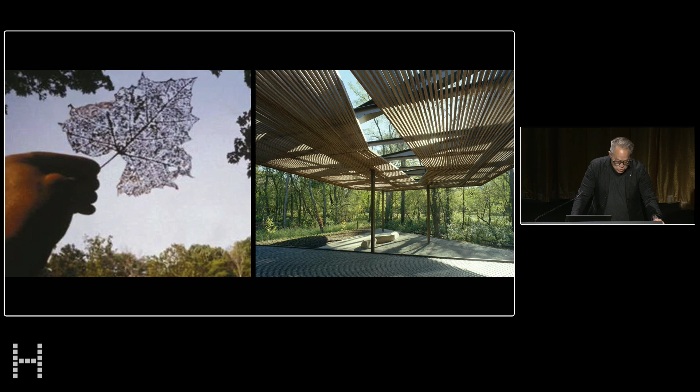So rather than see abstraction as a removal from reality, we really think of it as the process of connecting to place, generating a productive tension between the local and the global — I like to call it the glocal — and looking for possibilities of using an economy of means for a maximum of meaning. Here, 1 + 1 never equals 2. We're always looking for 1 + 1 to equal 3 or 5 or 7, really to create the value proposition in our work — in this effort it takes to be resourceful, working with very little, to emplace architecture in places you would least expect to find it.

We're a firm now of 25 very talented folks based in Fayetteville, and over the last 30 years we've been working on a variety of building types and scales, everything from a carport to a new American embassy in the poorest country in the world, the Central African Republic. This map shows how we've begun to spread out and work nationally and internationally, but always thinking about vocabulary, syntax, grammar—how we speak through the fundamentals of architecture: space, material, and light.

For us, place is the canvas, and architecture is the medium, shaped by the forces of nature and public life, in particular to local form. I like to say we do work that's in the place, of the place, for the place, and sometimes necessarily out of place. That's the way it works. Place is defined as a tangible representation of that intangible society that lives within it.

I like to call this placeness. To make an architecture of placeness, I think it's necessary to embrace everything, even the bad things of a place, to get below the surface to the underbelly, so we can understand these things and incorporate them into what an architecture of the place, in the place, and for the place can be. Often this is really a transformation story, and I like to think of every project we're working on as that.

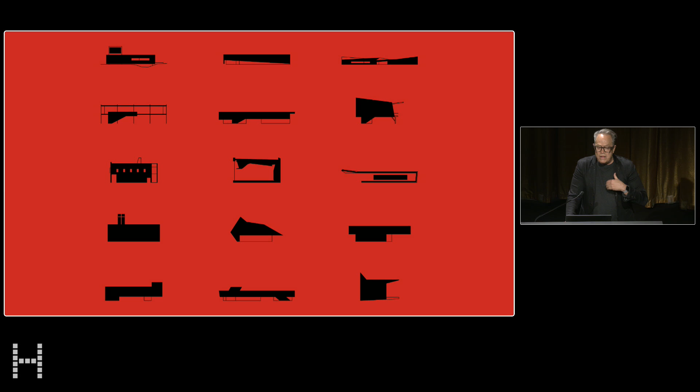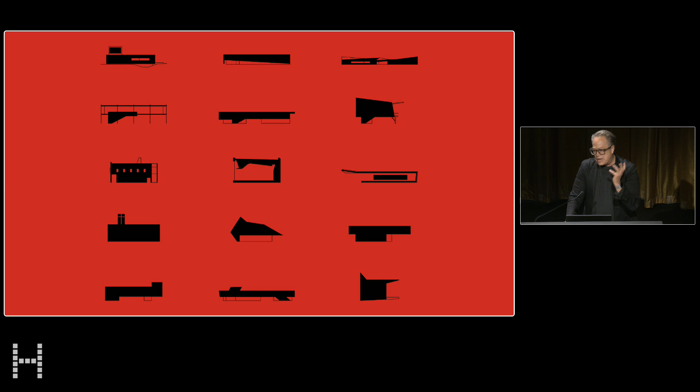As a former cartoonist, which I did all the way through college, I only recently, in the last 10 years, discovered that almost everything we do is sort of sectional, really thinking of architecture as a visage. So the fugitive nature of the profile and the silhouette is very important to the work. Part of that is because we're working in places where there's more space than form, so we work in the round. We have to design every facade, not just an infill, so we're always thinking about how it presents itself against the horizon.

So I'll dive into some projects. The first project is one that Grace brought up, and I think it embodies a lot of what we're about. This is the St. Nicholas Eastern Orthodox Church, a small congregation worshiping in Springdale, Arkansas. They were worshiping in a pretty rundown office building, not a very dignified place. They have a very aestheticized form of worship.

They were desiring a new sanctuary and fellowship hall, and one of their parishioners died. So they took the money she left and bought 3.5 acres next to the interstate, and with the money left over they wanted to build a new sanctuary. We went out onto their site, and they had about $100 a square foot to build this. I asked them, how do you want to approach this? They said, well, we think the best idea is to take this old welding shed on the site and turn it into the church. I said, you mean tear it down and build on the footprint, right?

And they said, no. I mean, we only have $100 a square foot. My heart just sank. What to do? But we did what we do on a lot of projects: go do the research, go back to the origins. We thought, what could we do as an architect that wouldn't cost anything or much? Proportion and scale are relatively free. So we went back to the origins of the Greek proportioning system and the origins of the church, looking at early churches and chapels, and using this proportioning system reconfigured the whole metal box into this new sacred figure that captures all the icons and the colors. Then we threw in a little bit of Corbusier, because I believe everything goes better with a little Corb, and this makes this new church.

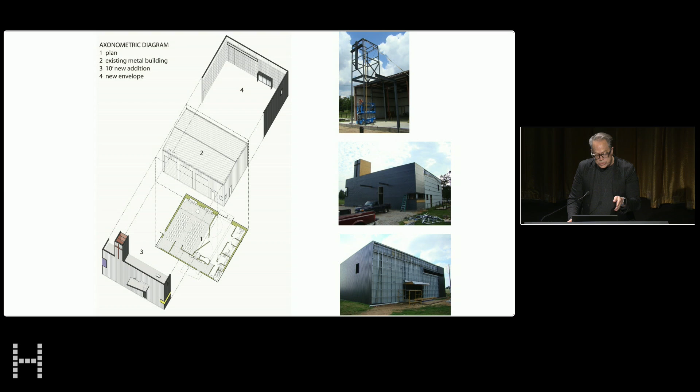How did we do that? Well, we took the existing building and left it essentially as is. We wrapped it in a new box rib metal skin, off the shelf. We then added 10 feet to the front of the building to create a narthex that could get you back on the traditional east-west axes, with movable walls that open into the fellowship hall, which can also expand during overflow services. So pretty straightforward.

And then we carefully coursed everything. With a fidelity to craft and thought with this ordinary system, we customized our own transitional details to get the maximum level of seamlessness we could in the transitions. Even the doors are coursed, the windows, quite precise. You can see the concrete pad that tells you where the exit door is. But really trying to elevate it, we cut one window in the existing building to get some morning light.

The iconostasis is made out of angle iron. But one of the things they really demanded was a dome.

We couldn't put it on the building because we had pre-engineered structure, so they allowed us to put something underneath. They couldn't afford a dome. The contractor couldn't afford it, or didn't know if he could build one that would meet our standards. So he had a friend of his who loved beer, lived out in the country about 20 miles away, that we traded a couple cases of Budweiser for. And here you go—he gave us a satellite dish.

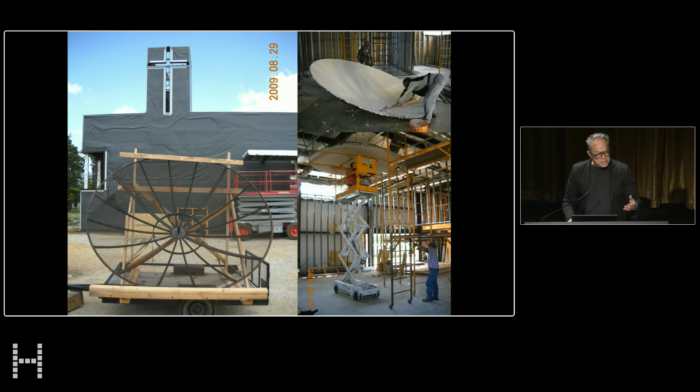So we took the satellite dish, brought it in, skim-coated with plaster. It's got its own natural lath, jacked it up on a scissor lift, and we have our dome. So that's how we roll in Arkansas.

And I told Father John, I said, this is fantastic. Now you have a direct connection to God. And he informed me it was kind of pointed in the wrong direction. But nonetheless...

As Grace said, we got a call in 2013 to inform us that this had won a National AIA Honor Award, which we were really excited about. And they said they were really impressed with the budget we built this for. So we went back and did some research, and they came back and said they believe this is the least expensive building to ever win a National AIA Honor Award.

So it really underscores what we've been trying to do for the last 30 years, which is to demonstrate that architecture can happen anywhere, at any scale, at any budget, and for anyone. It should not just be reserved for the few—it should be accessible by everyone. And I think this project certainly proves that.

So this idea of taking our local material culture and using that as a way to intervene is happening now in a new project at a much different scale, a much different budget. This is the Whole Health Institute—well, not exactly this, this is something it's not going to be—but the Whole Health Institute on the Crystal Bridges campus in Northwest Arkansas.

This is a national preventative health institute that deals with life management and well-being, as well as Art Bridges, another national institute committed to getting art out of museum basements and into communities. That's all part of this complex.

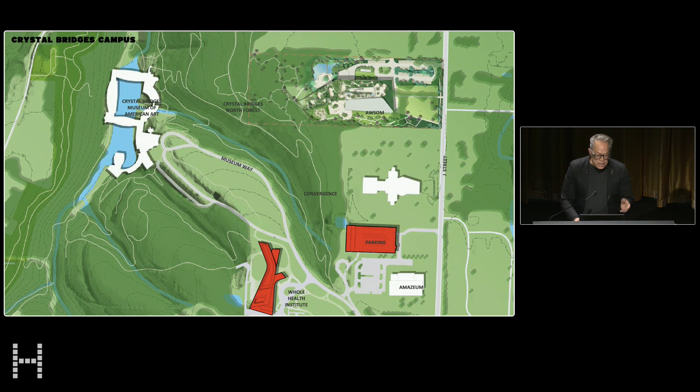So this is the campus of Crystal Bridges Museum. This is the Moshe Safdie Design Museum, bridging over the creek. There's a new medical school being built, a college about preventative health, and then in red you see our two buildings—on the left, the Whole Health, and then an 800-car parking garage that had to be built because this was displacing surface parking.

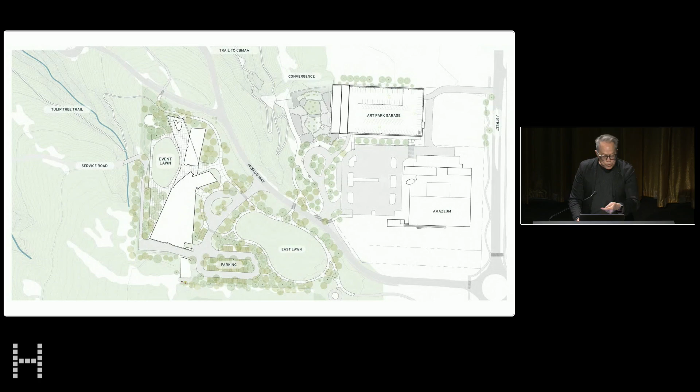So you begin to see the building as it curves and begins to gesture around the existing ravine to create an event lawn, as well as greet people with this dog trot that goes through the site. It's really a type of extended threshold through the site.

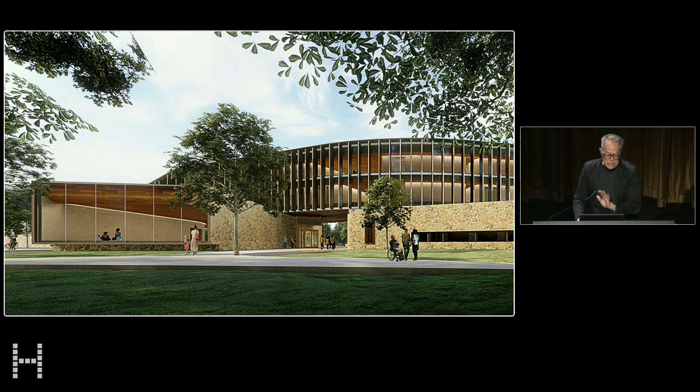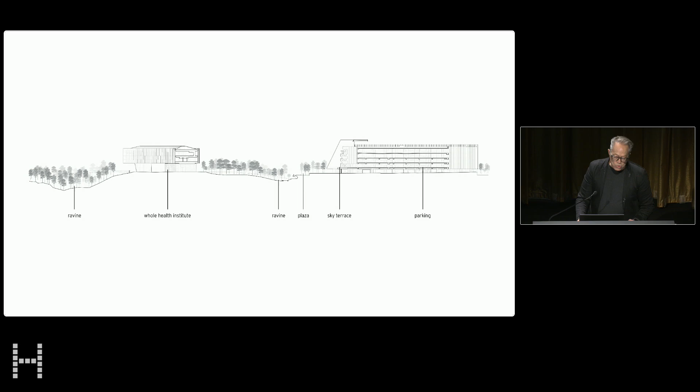The upper part is all developed through a series of pre-weathered brass fins, a brise-soleil on the east and west side. So you have the base, you have the top, and you begin to see how the ravines help create the responsiveness of both the garage and the whole health institute in their forming and shaping.

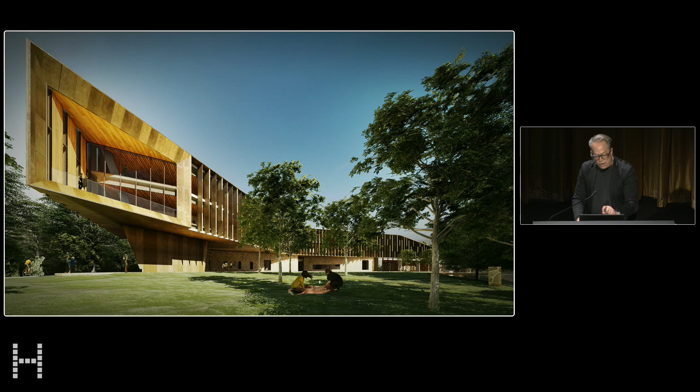And then creating a variety of porches and thresholds in the campus. So this is where people first come onto the Crystal Bridges campus, and then the community porch here, all the offices up above, all the event and public spaces on the ground level. And so the material strategies are quite

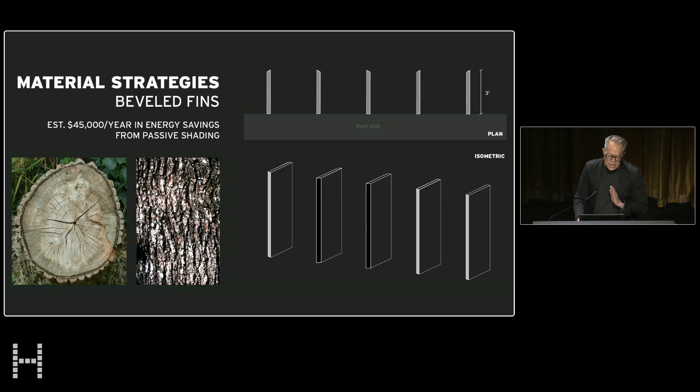straightforward, taking the analog of the tree, the fins, the vertical striations of the forest, but then translating that into pre-weathered brass fins, and then manipulating the edges of those fins to reflect light and shadow and create a kind of kinetic device as they move along.

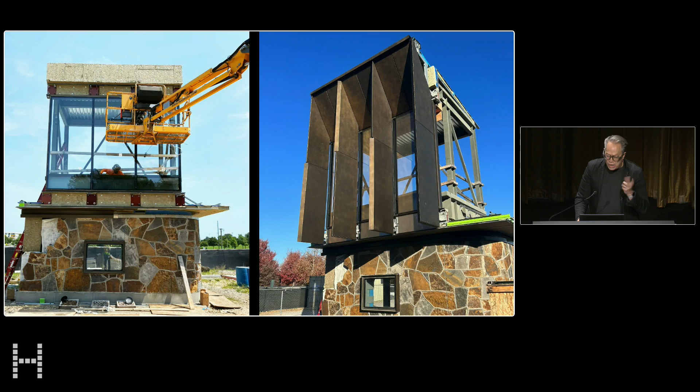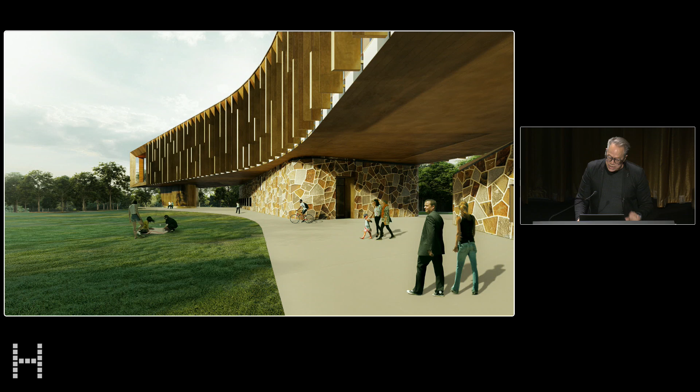So this is the mock-up, full-scale mock-up that we've been working on, to test the stone, to test the brass fins, but this is the effect we'll be looking for. And here, kind of the flickering, so it pulses with the forces of the nature across the day.

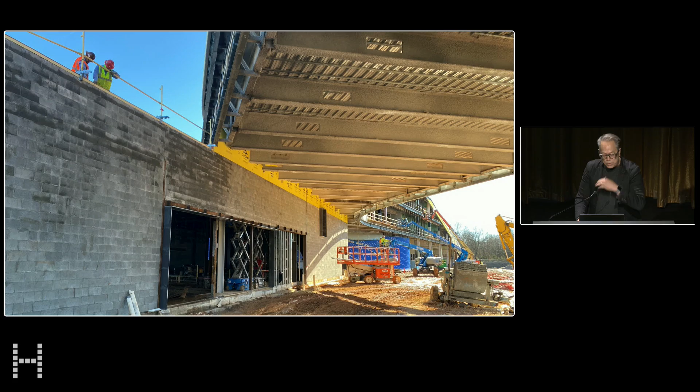It's currently under construction, so here the wall is awaiting the stone, and then the copper, the bridge is flying over. The stone, it's never been done at this height. It's 19-foot tall. We've done a lot of mock-ups using rope joints and really careful selection and mix of stone, and also shaping of the stone to get what we're after here. But this really will begin to enliven what's below.

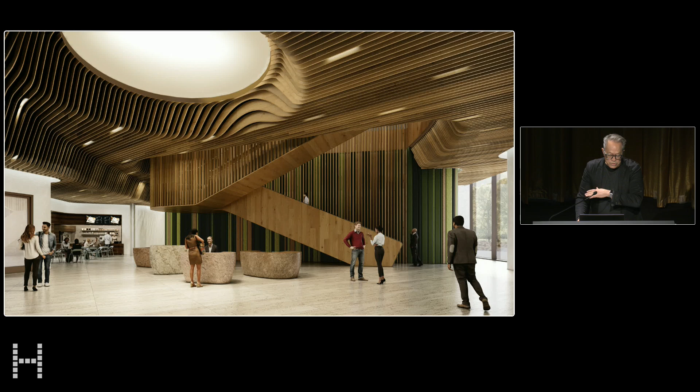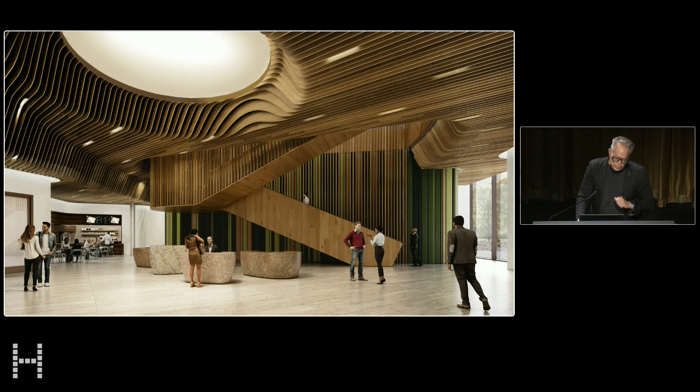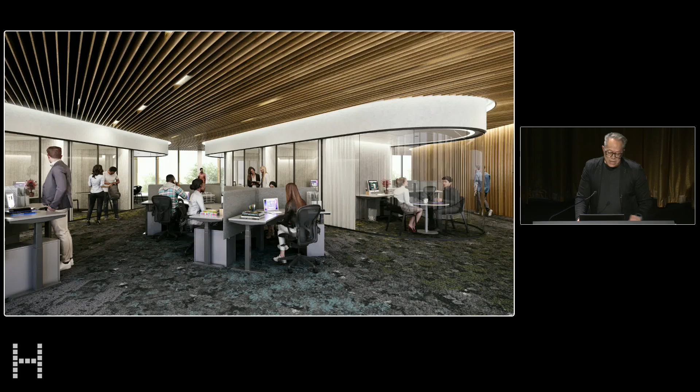And then once you move inside, that stone translates to a stone floor, but then the forest is actually pecan ribs that's CNC milled on the computer to kind of create the canopy and the datum for each one of the spaces here. So this is the entrance here, but even up in the office area, that datum of pecan sort of establishes the relationship, reciprocal relationship, and then a series of offices, open offices, and conference rooms are sandwiched between.

And so this is under construction now. Like I said, it should be done by the end of the year. It really becomes about an intersection between art, nature, architecture, and health. And that is kind of a new thing for a museum campus, to expand into architecture and health as part of its mission. And my parting shot here of the piece that's under construction at the moment.

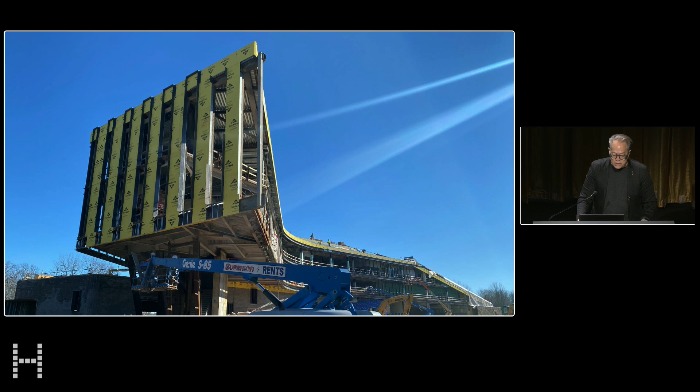Now, its companion piece is a parking garage, which is really just supposed to be a parking garage, but we threw out to the owner, we said, well, what if it were more? It's right on the edge of this playscape, goes down a ravine called Convergence, has a plaza. Bryan Hanes' studio out of Philly, landscape students, architecture firm is doing that.

So we came up with the idea of a proscenium where art performances and art can happen, and people come through the garage and through the proscenium, and then a glass bar down below and a retail shop and other things. So we really start to program it. Again, 1 + 1 has to equal more than 2.

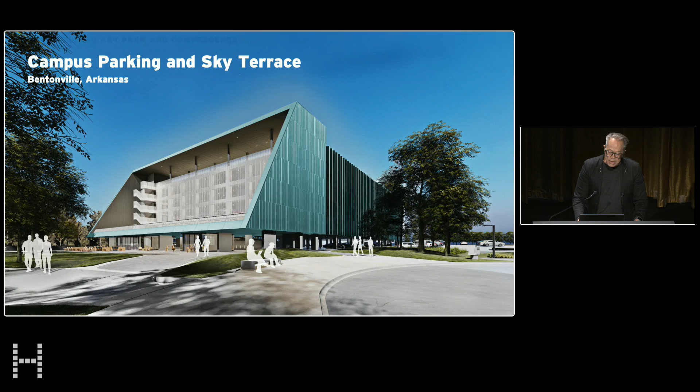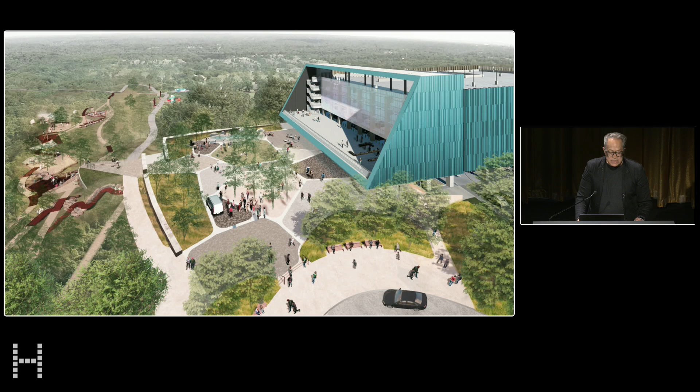And you can see its relationship to the plaza and how it receives the landscape, both going down and coming back up, can kind of get a sense of how that works. So it really is like a big catcher's mitt at the end of that.

One of the things that we've been working on material-wise to give specificity and identity for very little money is working with Sherwin-Williams and PPG codes, automotive body paint. They have every code of every paint that's ever been done in the automotive industry. And so this is my grandmother's '65 Pontiac Tempest, Agua Azur.

So we customize paints, and if you're using a lot of metal, it costs very little. And then we use gold metal flake or silver metal flake based on Dale Jeffries, who kind of invented this with sports cars and race cars back in the 50s, and we tested out with that. So the whole building is all automotive body paint, which is very resilient and really comes alive, especially with the different light during the day and at night and with the sky and such.

But this will become fully, it's got some of the first bits of sculpture and stuff in it now, the lighting. It'll come online fully in about a month and a half right now with the new bar. So we're often working in strange contexts.

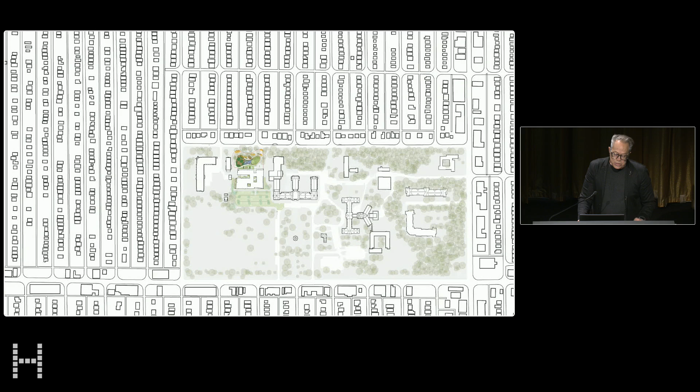I think one of the things that was really important to the community was to have an identity that was representational for them. We did not do the civic engagement ourselves; that had to be done with a third party, with folks that had the street cred to engage. But we got information back, and one of the things we heard from folks in the neighborhood is they didn't want a monochromatic building. They didn't want another stone building, brick building, or all-metal building. They wanted something polychromatic, something that represented their desire for diversity, inclusivity, and such.

I got to talking with the vice president of Kresge Foundation, Wendy L. Jackson, and I was thinking, it's terrifying - I don't know if you've pulled a lot of color into a building, but it's one thing to be inside, another to be outside, especially when your only color is red that you work with. But talking with her, she said, try to think of this somewhat like a quilt, a patchwork. And I said, oh, you mean like the quilts from the quilt ladies in Gee's Bend, Alabama? She said yes. I said, well, I've been there many times. She said, well, so have I.

If you don't know who these ladies are, they're pretty amazing. They take discarded cloths, discarded rags, and stitch them together into useful and beautiful works of art, such that they're now displayed in MoMA, but also usable at home. That's the sort of approach. I went and met with and saw the Pettway family, who kind of runs the co-op there in Gee's Bend, just asking questions and looking around.

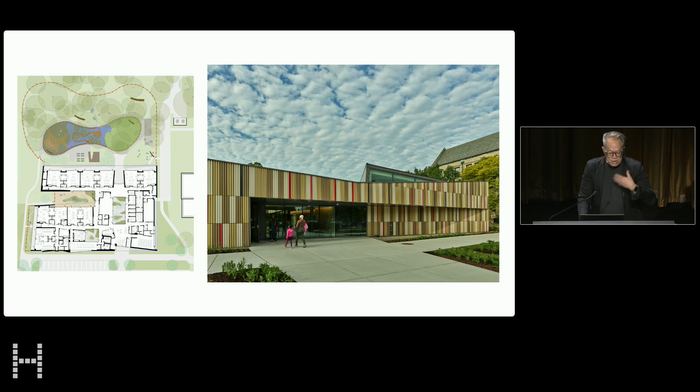So this articulates the facade. The wall leans in for your entry, and as you go inside, you come to your first courtyard. That's your focus. To the lobby on the left is a coffee shop for families. On the right, community spaces for different organizations in the community.

You begin to see how these work as vitrines for light, for meetings, and for play. Every classroom has a direct connection to a courtyard, so they can improvise and take learning immediately from inside to outside - it's a classroom in effect as well. You get to see how that works, again a controlled place for play, again talking prenatal all the way to kindergarten.

Every space, even the corridors, we carved away for places to sit and socialize. Here's their reading library nook carved out of that hallway, and community spaces where community groups can visit. So when a family drops their child off, they don't have to leave - they can stay, have a coffee, do work. They're really part of the center here.

These spaces also bleed off to the north side, on the neighborhood side in this case, where we have a play landscape designed by Margie Ruddick, which is absolutely beautiful. It's woven between this existing grove of trees. At night, it becomes a sort of beacon in the neighborhood. People come from the neighborhood and can walk through all the way to the other side - so there's sort of the local entrance and the more visitor entrance.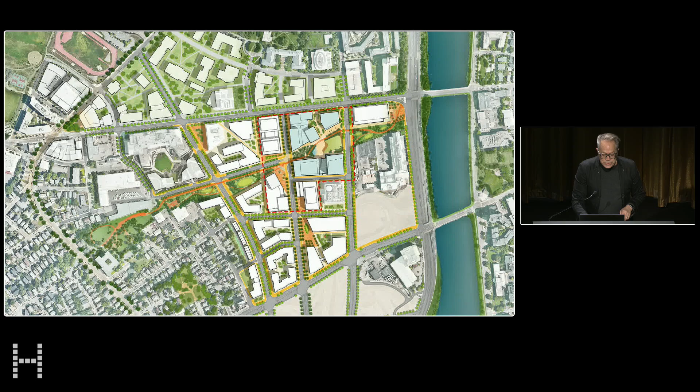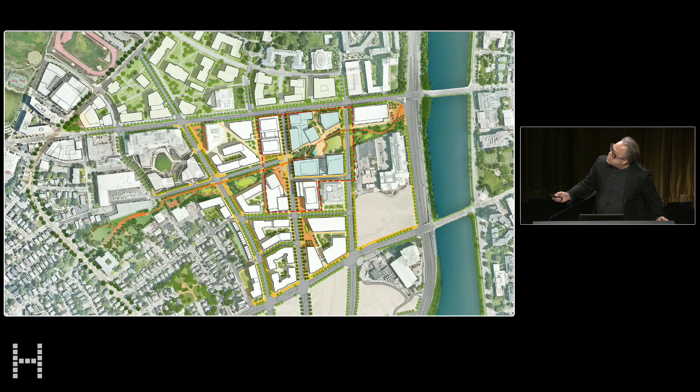Let me see if this works. So there we are, right here. This is the first part that's currently under construction. You can see how the greenway works all the way back to the river. It's really going to be a spectacular public way for the city.

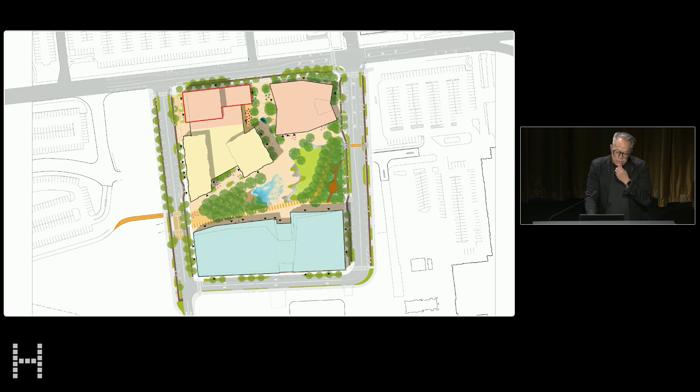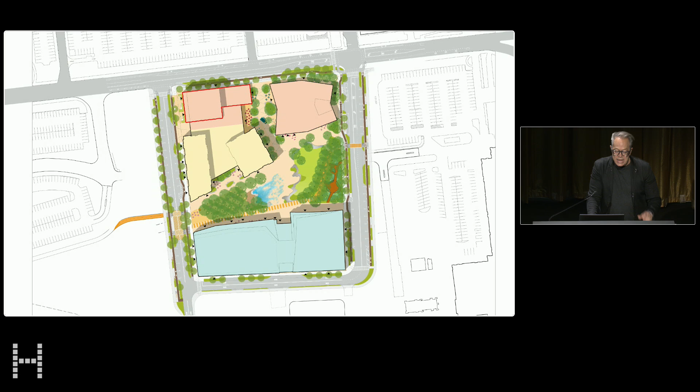Zooming in along Western, in many ways we sort of saw this ensemble that we were given. We walked in, and it had already been master planned when we were brought on. I sort of saw the master plan and the way things were arranged and their massing as like a still life on a table.

But that's what we were given, this sort of table and tower scheme. We were really interested in establishing frontality along Western. So we found a way to get rid of this idea of table and tower and just make it one thing, a frontal piece, then activating the ground floor. So now it's a very specific figure, activated with all types of business retail, but letting it touch the earth very lightly. Then shaping the skyline context of the figure so it begins to take on an identity, and enhancing the streets through landscape in a series of porches and clefts that people can interface with, between the laneway and the different landscapes.

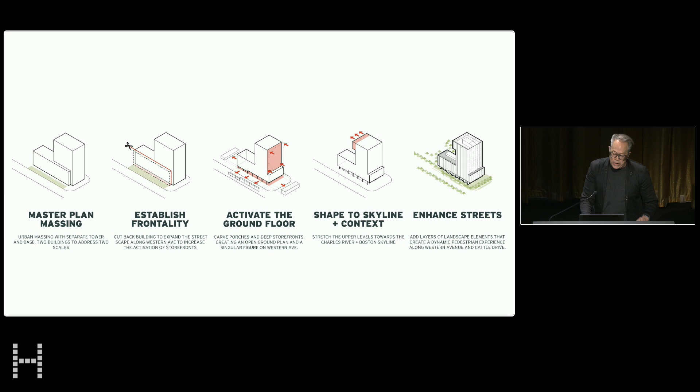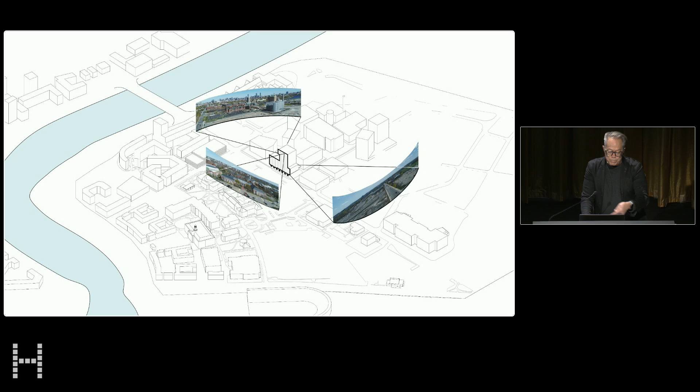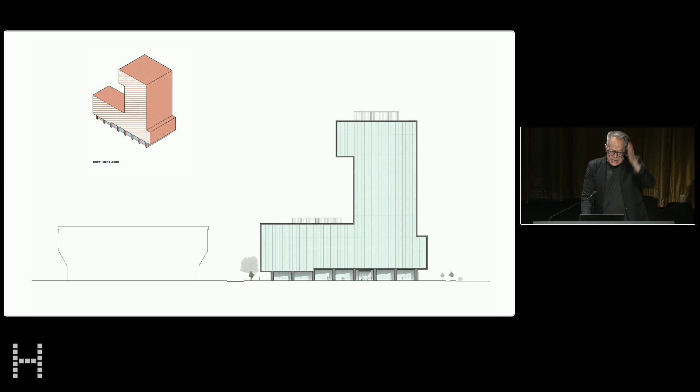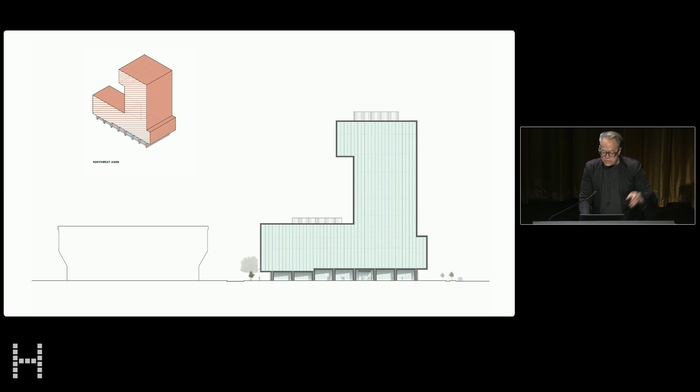Here's just the basic simple elevation. You can see how it begins to work with the massing along Western Ave, but just a very simple figure. The idea, on the north side, is to take the daily life of the hotel and expose it to the city. So all of the activity happening with the guests, closing curtains, opening curtains, meeting the sun, Life of Brian, all of that stuff can happen along that north side, and then it wraps on three sides in a beautiful, lustrous aluminum cladding system that's slightly scalloped and curves to create an exaggeration of shadow over the course of the day.

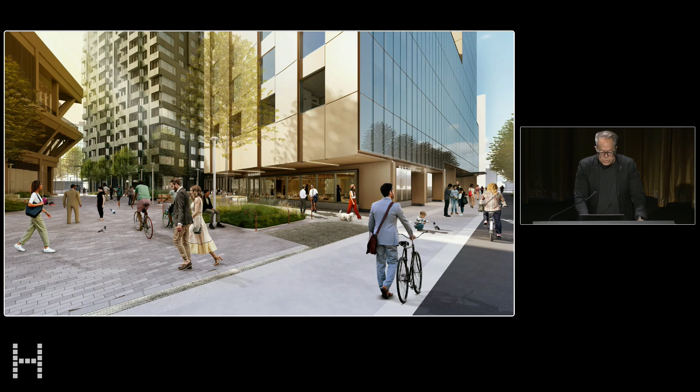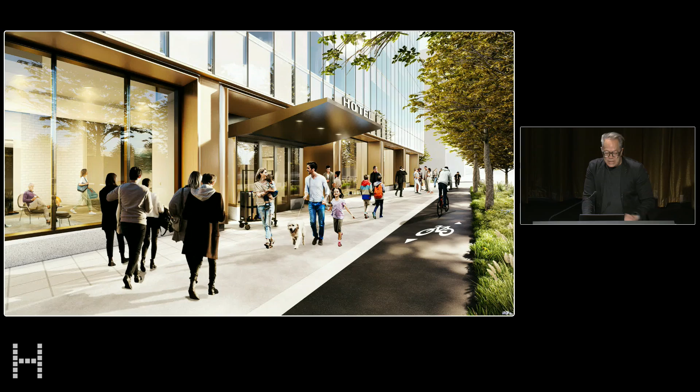These are the different porches and clefts, so as it comes down, it creates places for shade and shadow. Where you find shade and shadow, you usually find people, something we've learned pretty much wherever we go. Articulating the street, the hotel entrance here, you can begin to see how these different rooms are activating the street along Western Ave, and then along Cattle Drive back towards Allston, another porch and cleft, and then that view from Allston.

And then at night, that really gets activated too in the sort of stripped down way, and these are reveals that are reversed, so there's no mullions. The reveal actually goes into the building rather than out front. And then there's a bar up top and all that good stuff. So anyways, that's under construction, and it should be pretty cool. It should be a great place when it's all said and done.

So working on that was, by the way, our first urban building. We've never done an urban building, so we're trying. We've never done a tall building other than a little tower once.

But we also work in more places like this in the suburban places, in this case a golf course or golf community. We had a couple who were 70 years old, and they wanted to downsize into their dream house, which would be a courtyard house in this neighborhood. The neighborhood I couldn't speak too highly about, because it has all that stuff I really detest, but we had an opportunity to do a really nice house.

We don't do a lot of houses, but we developed a scheme, just looking at the old Roman courtyard house, so to speak, out of brick, that works with this sort of tilted landscape back to the woods. So they wanted this more formal entry, so we began to make it as sort of an exercise in figure and thickness along this northern facade to grab light from multiple areas and really set up the entrance, and then even create this frontality through the textured brick.

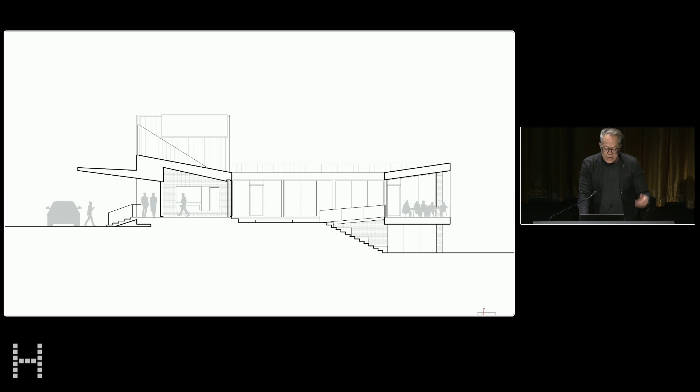But as you come in, everything works around this really beautiful courtyard. Everything is programmed around it. And sectionally, you can begin to see how it takes the idea of the courtyard, but then begins to adapt to the landscape, which is sloping back towards the south. So we actually complete the courtyard with a bridge, an outdoor bridge that is really a terrace and porch as well, and it really becomes a great place for a party, I gotta say.

But you can move underneath, and of course we're in Arkansas, we're trying to create places for shade and shadow, coolness, and you can see, being on the bridge here, looking back, a sort of interior lantern. And then as you move through, the whole expression of the house begins to move from the very controlled windows facing the public, but as you move back into the woods, it really opens up to become a whole other expression, so another kind of split personality house that transforms and is really governed by the land and the forest beyond.

So another aspect of what we do, and I have a bunch of projects, but I'm only going to show one tonight, that deal with this issue of ennobling the prosaic. We've been trying, as I thought Gracie said it beautifully, to do something ordinary extraordinarily well, and that's really often our mission in these simple projects that we get.

This is a project in Fort Worth, Texas. It's a new mixed-use project, but the owner, who I met in Detroit, who's been working with Quonset hut systems, wanted to try it out here in Fort Worth, where he's from the Dallas-Fort Worth area. His name is Philip Cockes, really great developer there.

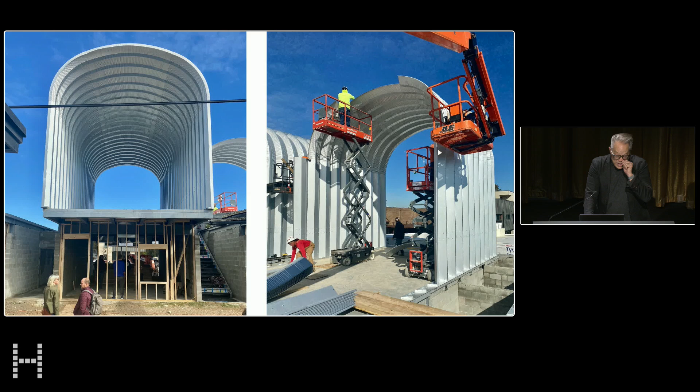Everything is prefabbed, comes out of Steelmaster out of Canada, and a hut goes up in a day and a half once you have the foundations and everything built in. So it was great to see how this come together, and just really, once it come together, be really quite beautiful.

Now, the curveball that we threw into the project is that we were looking for a more consistent vocabulary between these one-story buildings and these three-story buildings. And so what we decided to do is flip the Quonsets on their side to turn them from structure into cladding. And that created some really amazing opportunities in the horizontal corrugation of how you introduce windows when they're no longer tied to the structure in such a way.

We began to animate this whole street edge, like this window here that kind of puckers out from the side. So it's a kind of eccentricity that we were able to develop. And then as you walk along the sidewalk, you literally look into the kitchen of the restaurant, you can see the chef working and so forth. So really the way to kind of urbanize the situation too.

This is Julie's public plaza and the walks between, all made out of recycled stone and using pond cypress and cypress, really reductive palette. Most landscape architects I know use it like walls or screens or edges. She uses these trees like jazz notes in the way she distributes them over it, which will eventually be a type of forest in the urban condition.

And then the other building, again, figuring out how to make openings. We had to kind of come up with different forms of detailing for windows and for doorways and cutouts, so forth, to create some depth and relief in these, but it really made for an interesting detailing exercise.

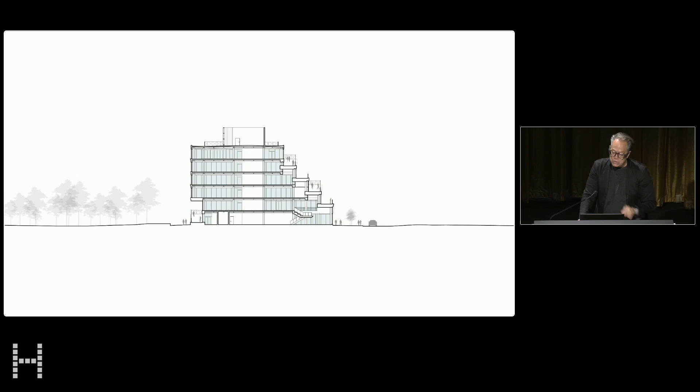And then that creates this gasket of space between the trays of offices and the stepping that you run into. So when you're down at the street, it feels almost like a 1 or 2-story building, which is really important to this small town of Bentonville, that it not loom per se.

And there's a dog trot through, and here's again that interface between interior and exterior in the lobby area. And then seeing the mobility, I mean it really is what you look at. You have views, and it's people moving back and forth, and it's quite exciting.

And here you can see it too. This was, I think, on opening day. A lot of people here. But really exciting, it's been really well embraced by the community, and it's filling up fast, and then pretty exciting. So what we've attempted to do is manifest the culture and allow the local culture itself to begin to shape, in many ways, the ideas about public space and form for this particular office building.

So the last project I want to share with you is something we've really dedicated ourselves to, both public and independent schools. I think one of the most impoverished building types in the country are schools, maybe next to healthcare in some ways.

This is a really special school. It's an independent school, a maker school in Bentonville. Anyone can go here. It's tied to your family's income. So some people pay $500 a year, some people pay $25,000 a year. And they've been a huge success. It just all came online a couple of years ago. It's called the Thaden School.

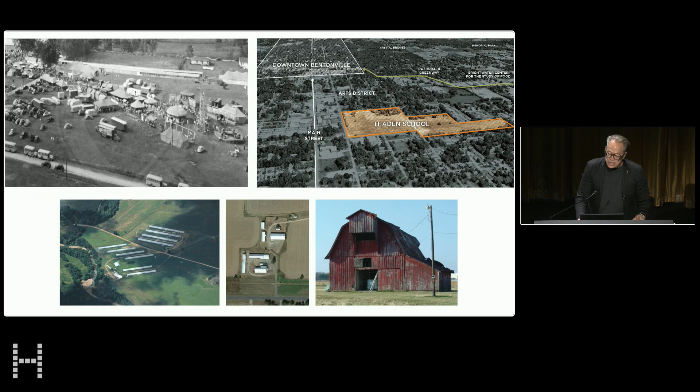The site is a 30-acre site, used to be the old fairgrounds, not far from downtown Bentonville. Obviously we're not looking at Quad City or whatever for inspiration on how to master plan this. We're really looking at farm groupings locally, chicken sheds, how they work with the environment for breezes and sun and so forth. That really helped us think about this not as a series of buildings and classrooms, but as one big classroom, the whole landscape as well as the buildings themselves.

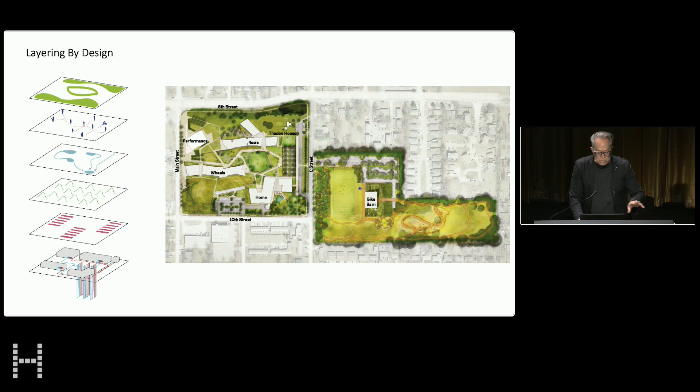Collaboration, master planning wise, with Andropogon out of Philly, landscape, as well as Eskew Dumez Ripple, who did the home building here. So we're looking at different types of indigenous plantings, how people circulate. They wanted everybody to walk outside and cross the campus, no canopies, nothing. Water management, the whole terrain using mima mounds and such, the programming, as well as community geothermal. And all of that works together as a way of learning. So they have learning landscapes too, all this project-based idea that happens in the classroom also happens into the outer classrooms as well.

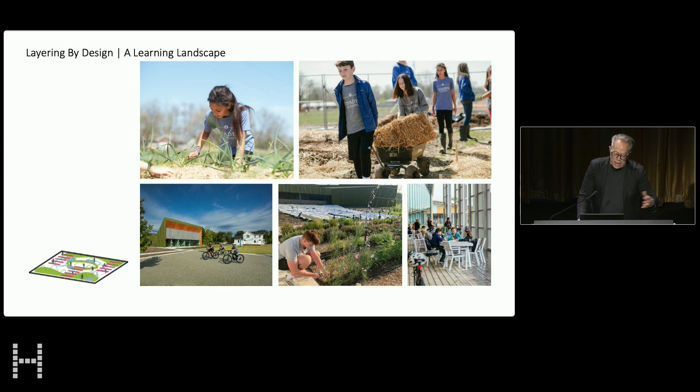So this is a kind of overview of what's been developed. It's a series of buildings that are made primarily out of box rib metal with a little bit of FRC and then plywood roofs. The home building by Eskew Dumez is an all-wood building, as well as the bike barn. So the Reels building is for humanities and arts, as well as the animation studios here.

Again, we're working with one-story buildings. What we're doing here, though, is trying to create difference in each classroom. So every classroom is sectionally different, is spatially different, not the kind of uniform seriality that you often see in schools. We're using an operation called pitch and roll, which is basically how you got an airplane, but we're doing that in the roofs to begin to split the roof, to get light into it, to begin to scale to the different programmatic needs of the building.

This one flips up at the end here. There's all chapel-like spaces down below for the different offices and collaboration space. But the animation and film, they also get to—this is a community lawn—project their films onto the building. They have hooks with a screen that can be attached to it. And this is also where part of the Bentonville Film Festival takes place now.

So again, they're trying to find ways to integrate the community. There's no security fence around the school. It's an open campus, very, very important. And two, getting back to what I was talking about earlier with Sherwin-Williams and PPG, we're looking at this relationship between what's culture-made and what's nature-made, and it's finding the kind of relations there through Osage prairie grass.

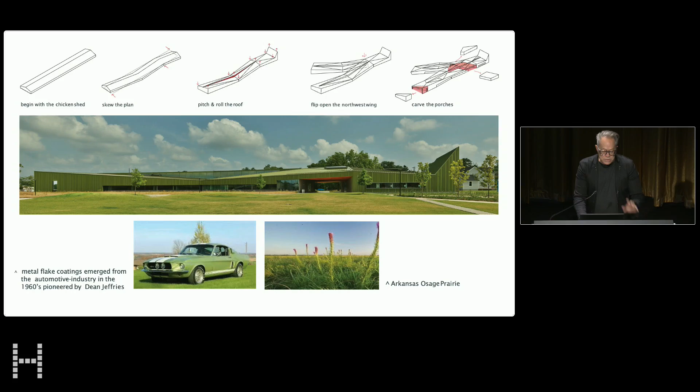One of our favorite cars is a 67 Shelby GT Cobra in its green gold phase. So we actually got the recipe for that automotive body paint for the building with gold metal flake, and we tested it out multiple times. And so now this is our Shelby GT here as a building. It really works well—it's always changing over the course of the day, has a lot of gold metal flake in it, reflecting light, but the landscape and it merged quite a bit.

In these linear buildings, we're cutting crossways through them, cross axes, to create a series of dog trots and porches for transition, but also these are learning spaces too. The kids get out there and do their assignments with chalk and stuff in the spaces out of the weather. And again, people come and they go into the most social spaces, which happens to be the hallway.

You can see in a horizontal building, it becomes quite vertical, letting daylight in. All of that's just regular plywood. You see no lights in the ceiling. Everything is uplit or integrated to just really feel the material, the different sectional ideas in the classrooms, all with direct connection to the outside. And then by pitching and rolling the roof, we can modulate its scale.

So as this gets closer to the boulevard, it begins to scale down with its brise-soleil as well, and buffers for sound for the student lounge. Now, its companion building, which is on Main Street, is called the Wheels Building. And this had to have some sort of, by the Design Excellence Program, some sort of engagement with Main Street.

So what we're doing is creating a screened porch that shields from the sun, but also gives kids a place to pull out their bikes and tools from the bike shop to begin to work on. They have a civic engagement program on Saturdays to work with local citizens fixing their bikes.

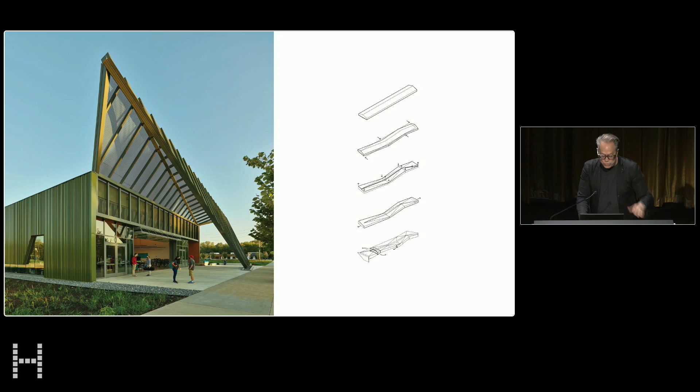The south side is a productive landscape, where they learn how to grow food. And in the home building, they have the teaching kitchens. The inside is similar, with a similar palette, but now the interstitial circulation spaces become project labs, and the output is displayed in a series of columnar vitrines.

And the bike shop, opening that up. Beyond, you see what is now the performance building for theater, music, drama, and choir. It was something I designed while I was at the Academy back in 2019 in Rome, so it has a little bit of Rome, and it's got a 300-foot long loggia.

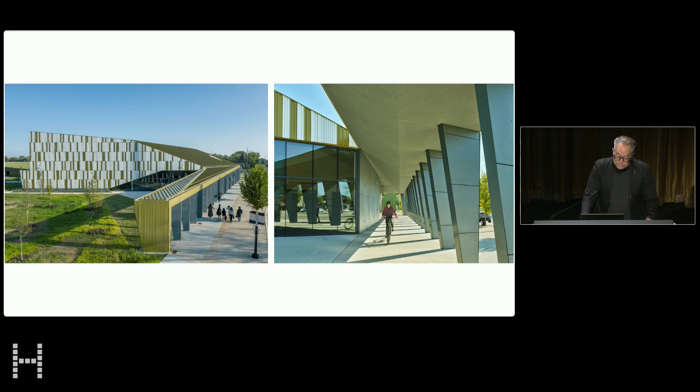Rather than putting the building in the corner, we put a space in the corner, a public plaza, and this becomes this sort of urban edge that currently is missing in a lot of Bentonville. It suggests how one could begin to develop this for bikers, skateboarders, pedestrians. It's quite an active place, and there's really no lobby for this teaching facility, so the porch is the lobby.

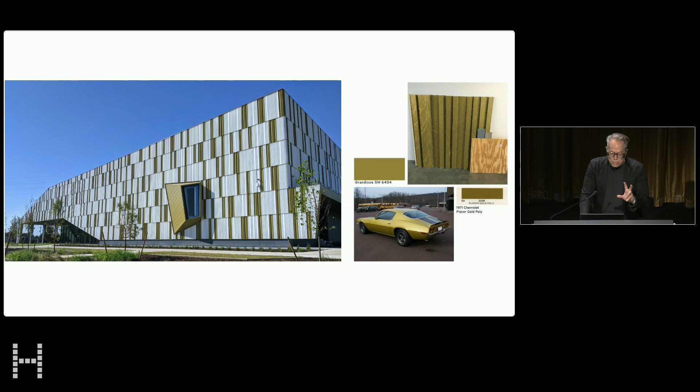Not to be outdone, it is the work of a 71 Camaro - instead of green gold, we went gold green on this one, with its one big oculus, or googly eye, I should say. The rake of the building is shaped by the rake of the auditorium beyond, and then by the porch here.

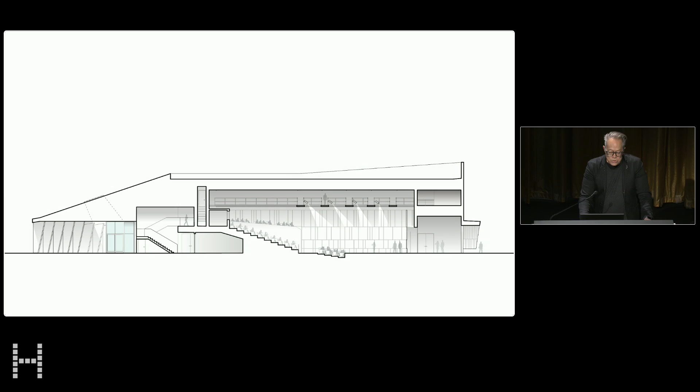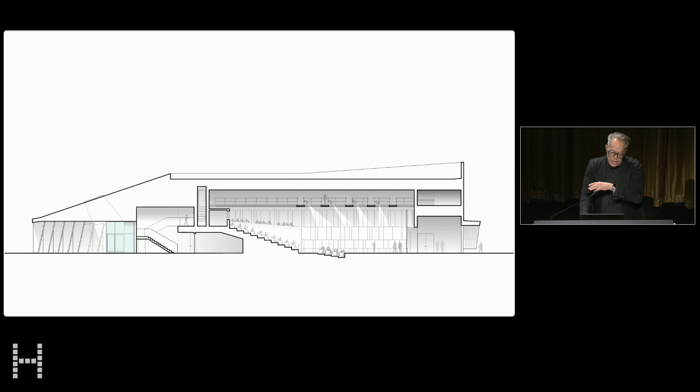Again, this is the lobby on the left, the porch. As you go in, you go off to the drama and music rooms on the left, or slip into the slot to go into the auditorium. The stage is ground level, so they can make all their sets in the wood shop, which is where the bike shop, wood shop, and robotics are. Then they wheel those across the campus right onto the stage seamlessly.

So it's kind of nice. Inside, it's all articulated with local red oak plywood. And we wanted one window, one connection with nature, with light.

This window is basically a kind of figure setup, an interior figure of soft troweled plaster, hand troweled, that bends the light around, connects you to the outside, but creates a nice display of light and warmth into the space.

And then outside, a really nice, beautiful expression of the window, a different figure acting as a kind of backdrop to the activities in the landscape.

Last building, they had to have a bike barn. They are called the Barnstormers, after Louise Thaden, and their mascot's an owl. The headmaster said we have to have a barn for a gym, and for our pump track - they have a bike pump track and such.

And so they wanted a barn that was like a real barn, kind of off the grid, that breathes through its skin, that ventilates. So I told him I'd been working on this barn for about 30 years.

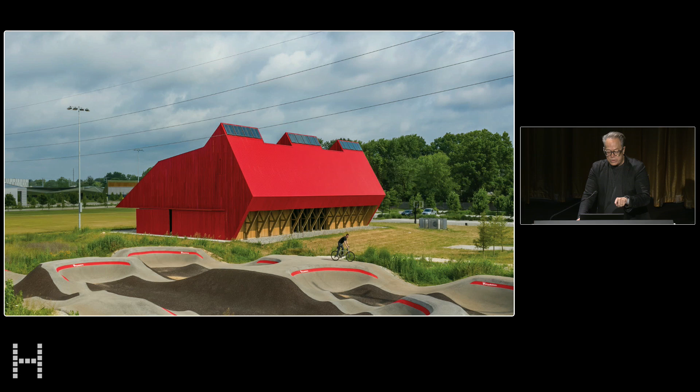So I finally had the opportunity to rethink the traditional gambrel Ozark barn into this beautiful cypress siding with copper screen behind it that breathes in between the boards, with, next to the pump track, a series of ventilating dormers that pop open and allow breezes to come underneath.

All the doors move, so it turns into really a kind of giant pavilion. It's all naturally ventilated, and it has this nice porch along the soccer field for bikers to get out of the sun.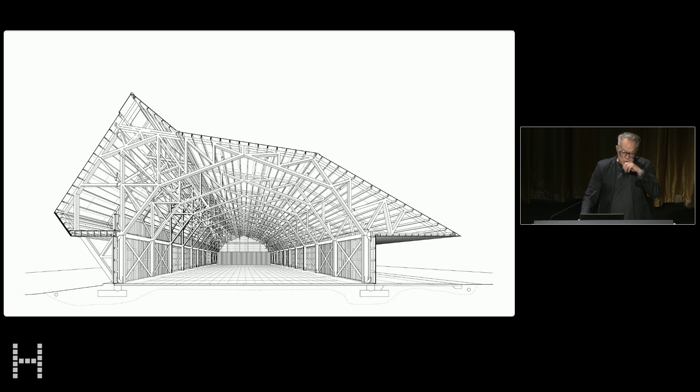We didn't have a lot of money for this, so I had no money for mass timber, which is like the thing now - you got to have mass timber or you're just not cool. I'm joking, I think mass timber is great.

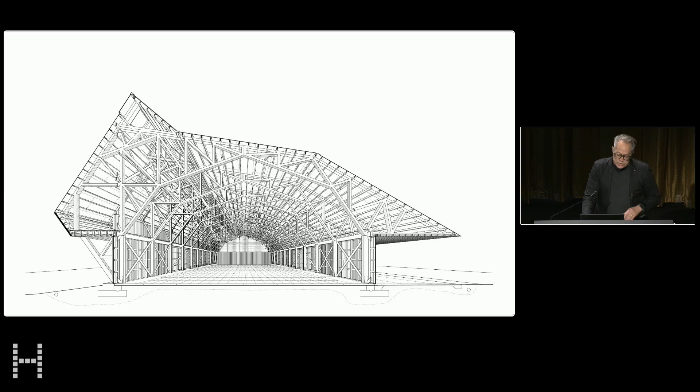Anyways, what we did was we used a mass of timber - we just had a local truss manufacturer gang nail a bunch of trusses together to make this really simple, beautiful structure.

You can begin to get a sense of this sort of pavilion-like nature of it here. And then just using our brains a little bit, how do we develop the articulation of the stair and the mezzanine? We just take 2x4s and cut them diagonally, rotate them, back screw them, and there's no waste to speak of, and it fits right in with the rest of the lightness of the pole barn and girts.

As the sun sets, during the day it's opaque, but our lighting designer worked with us so that as the sun sets, the light slowly comes on and it becomes somewhat translucent. And then as the sun sets over the horizon, it becomes transparent - this sort of icon for the campus and a little beacon in the community.

And with that, thank you very much.

Yeah, I did go an hour, which is longer than you wanted, but sorry. It's okay. I'm not used to talking that fast. Oh my gosh.

Thank you so much, what a treat to see all of those projects explicated even further. You can look at them in so many images, but not actually see—when we hear you talk about the material palettes, it's actually very revealing. I know many of you might have questions, so I want to turn it over to you, but I'm very curious. It's hard for me, let me see if I can think through this.